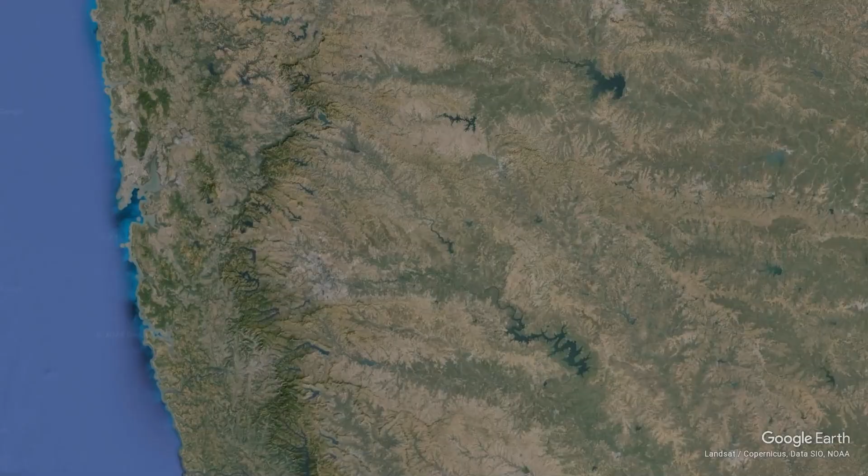Schools are meant to be a haven for learning and prospering, yet we seem to be failing our young generation with poor infrastructure and built environment that is detrimental to their well-being. Nestled within Pune and spanning 6,800 square meters, our site for Lodha World School is a part of a larger development by Lodha developers in the NIBM area. The school has been designed to accommodate 2,500 students from nursery to senior secondary.

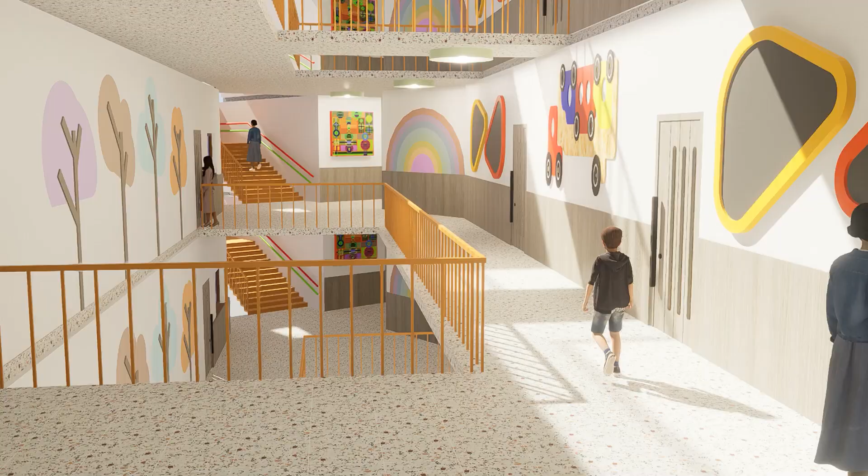The building in itself acts as a learning aid to align with modern teaching strategies and to cater to the evolving needs of today's learner. The rooftop garden provides a space for learning organic farming, helping students reconnect with nature while also facilitating agro-voltaicism, where the efficiency of the solar panels is further enhanced by the cooling effects of the plants underneath.

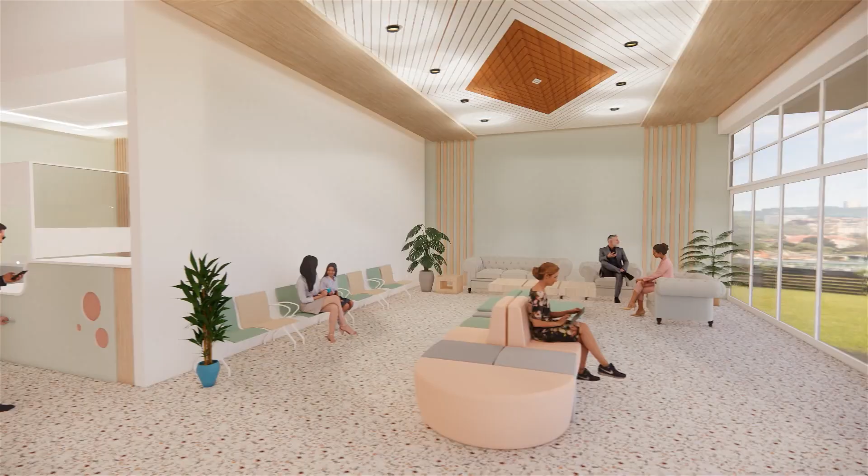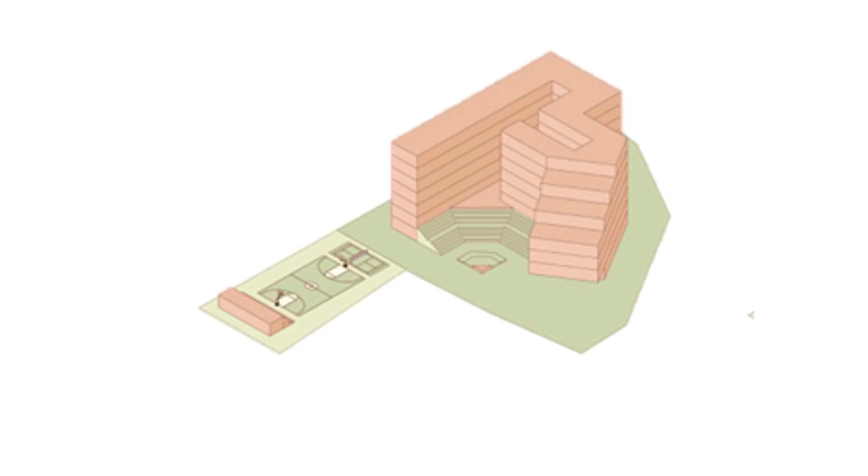The interiors are designed in soft pastel colors, creating a welcoming environment for young children, while also responding to the client's demand of a premium school building. The ergonomically designed spaces respond to the needs of growing children. The building form has evolved to respond to the site context and local climate in order to minimize heat gain while maximizing natural light and ventilation, thus ensuring thermal comfort throughout the year.

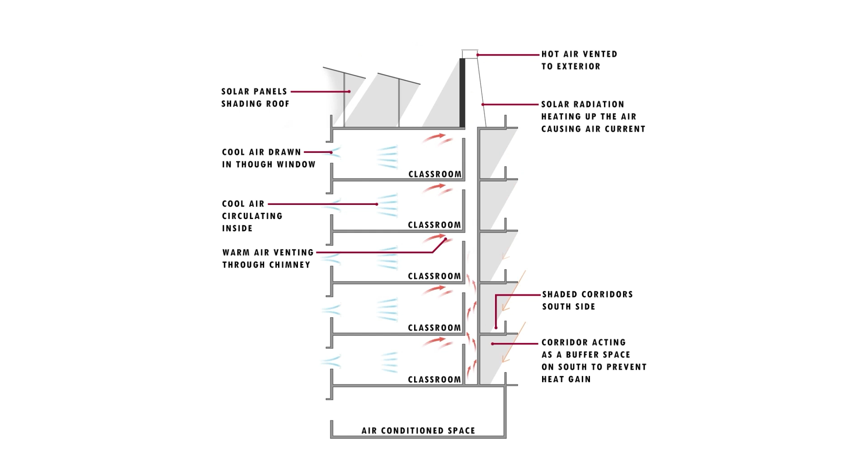Conditioned spaces strategically positioned along the eastern and southeastern zones create a buffer, effectively insulating the interiors. Labs with shorter occupancy periods are situated on the south and southeast periphery, while classrooms, primarily benefiting from the diffuse natural light, are oriented towards the north. The solar chimney facilitates the inlet of cool air. The double-skin bamboo facade reduces the heat gain from the southwest face. The roofs are created as filler slabs with insulation and painted with reflective paint to minimize heat gain.

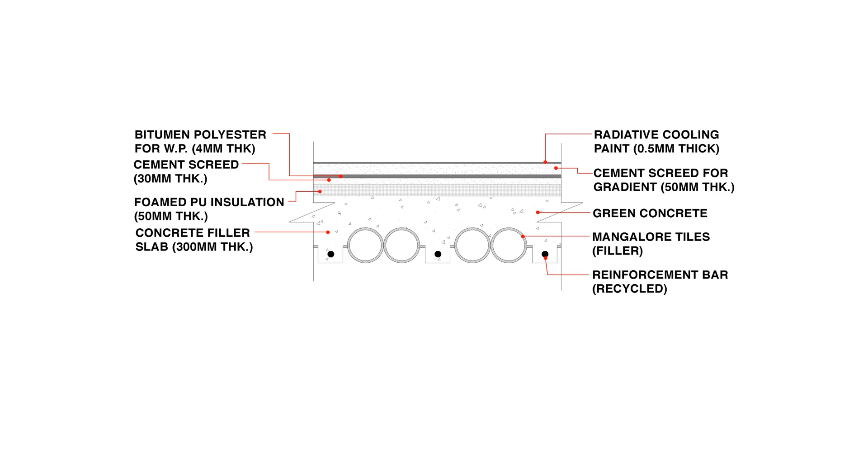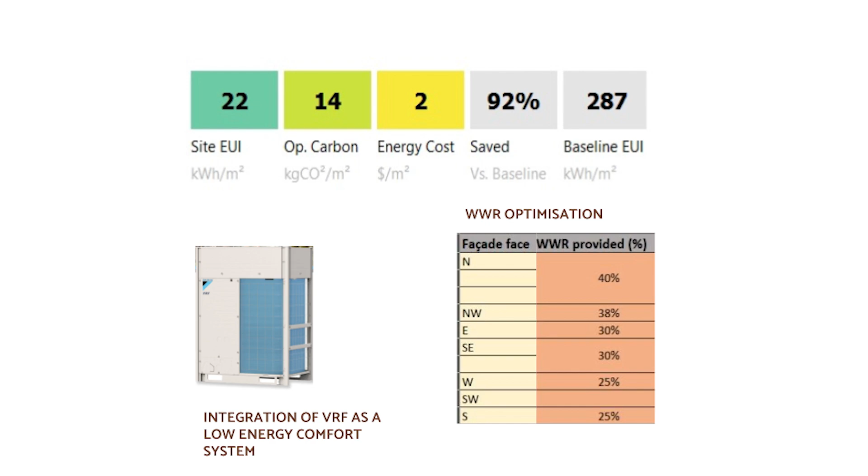Through the use of various passive cooling strategies, harnessing renewable energy through solar panels, and incorporating energy efficient systems, we have been able to achieve an EPI of 22 with net positive energy. Our solar shading device provides shade during summer and lets in sunlight during winter. It generates electricity through solar power. The tilt angle is further made adjustable, which makes it more efficient.

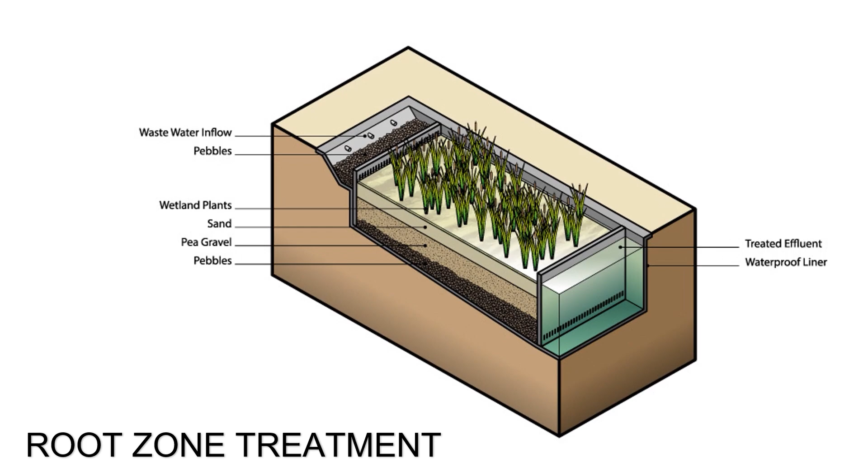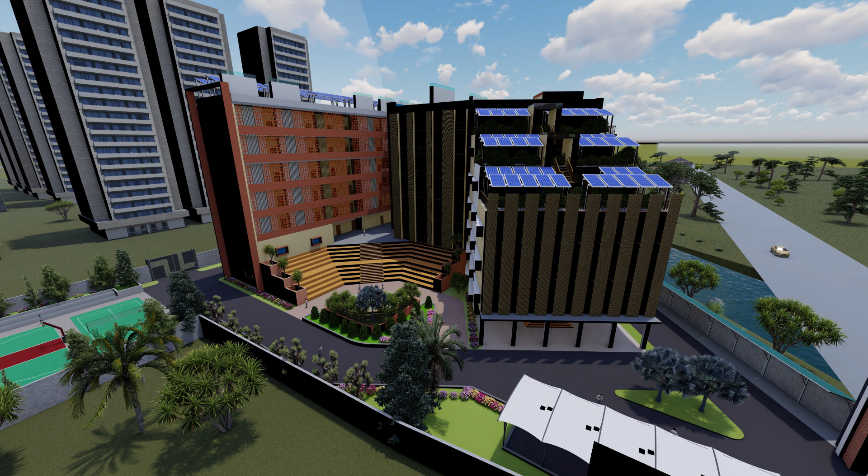Through strategies like xeriscaping and use of water-efficient fixtures, a 60% reduction in water consumption is achieved. Furthermore, the root zone treatment and rainwater management system helps to store water for future purposes. We have successfully achieved an energy autonomy of 15 days and a water autonomy of 2 days. Through carbon-negative materials like agrocrete bricks, polyester lime plaster, fly ash integration, and filler slabs, our building project has reduced its embodied carbon by a remarkable 40%.

By integrating sustainability into the built environment, schools can create healthier, more resilient, and more environmentally responsible spaces for learning and growth. Team Nova thanks the Solar Decathlon India for providing us with an opportunity to showcase our model for a sustainable education building that can cater to the evolving needs of today's learners.